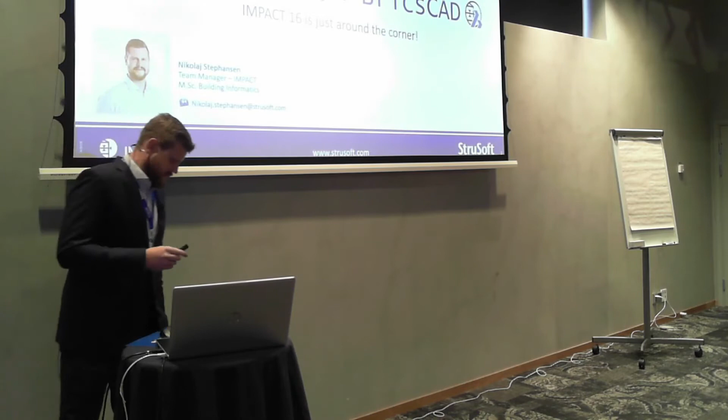I spoke a little bit with Peter about how much time I actually have. Peter said, do not go over five hours, Nikolaj — people will get tired. So let's see if we can keep it to maybe two or three hours, or somewhere around that. But we have a lot of time.

So before we actually start looking at the software, I want to give you guys a little treat. There's something coming out in December other than Impact 16, which is just as big news, if not bigger. Maybe some of you are thinking the same thing I'm thinking, maybe some of you aren't. So just lean back and relax, because we're going to watch the new Star Wars movie now.

And of course not, of course not. I'll jump back into Impact, so we can hopefully do this in roughly 40 minutes instead.

I've listed up a lot of things here, and what I wanted to do in the beginning to set the agenda was list up the features I'm going to talk about roughly. I'm not going to read up everything that's here, because it would just be me reading from a board.

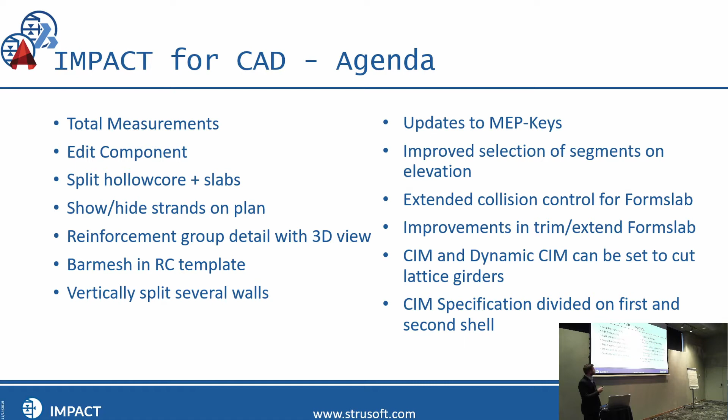So now you're looking here. We've been talking about a lot of different features. There's one thing in particular we've been talking about for Impact 16, especially for BricsCAD and AutoCAD, and that is the slab module. If you have good eyes, you can see this is not here on the agenda. Why not? Because I thought it was too little text to put on there. So we have a big 'Slab 16' text at the bottom. And of course there are more features in Slab 16, but I just couldn't fit it on the screen. So you'll get that as a surprise when we get there.

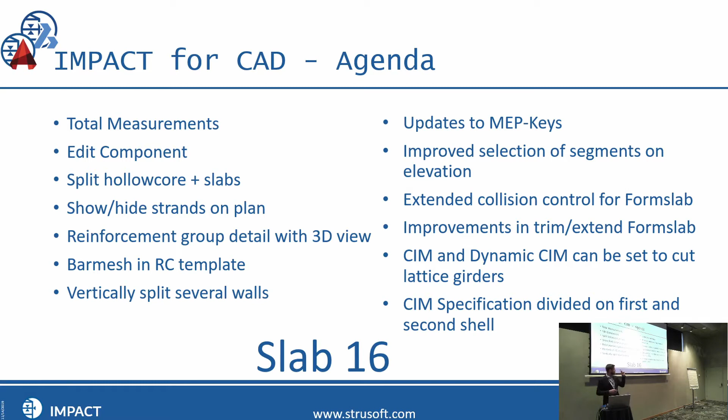The first thing we're starting out with is total measurements. What I did here was take a regular wall drawing, a very simple one, a screenshot that looks like it usually does in the Impact standard.

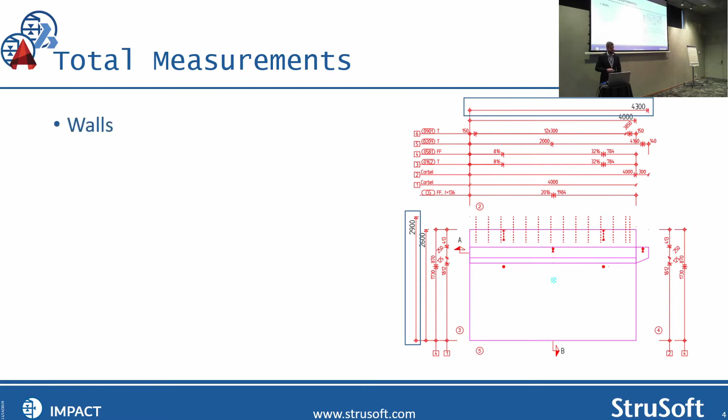What is the new thing here? You might not recognize it at first glance, but if we put a box around it and animate it a little, you can see there are actually two new things — two small dimension lines. But it can make a huge difference for the guys designing, because you need to know the size when you're drawing this element. Here in the example it's a wall, but it doesn't mean this is exclusive to walls — it just means that's the first example I put up.

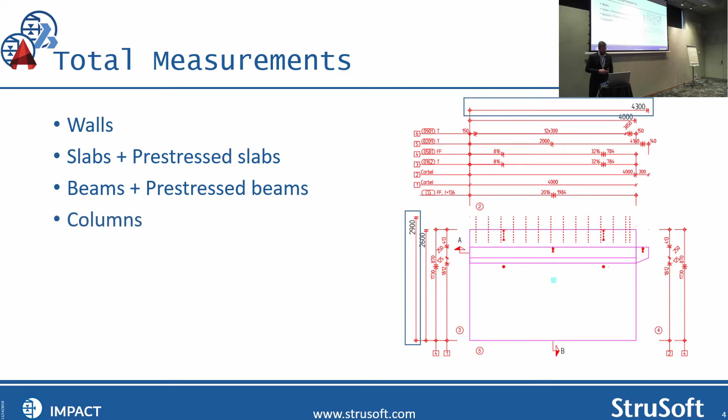So it applies to slabs, pre-stressed slabs as well, beams, pre-stressed beams, and columns too — it is in a lot of the element modules. Other than what you can see here, it includes the geometry from the corbel, and it also includes the geometry from the cast-in materials that we put in at the top.

It can also include reinforcement, where you can add typical tolerances yourself. It's a little bit different how you actually have the reinforcement - is it laying into the element, or is it pointing out always? But here you can set your own tolerances for that as well in the new total measurements.

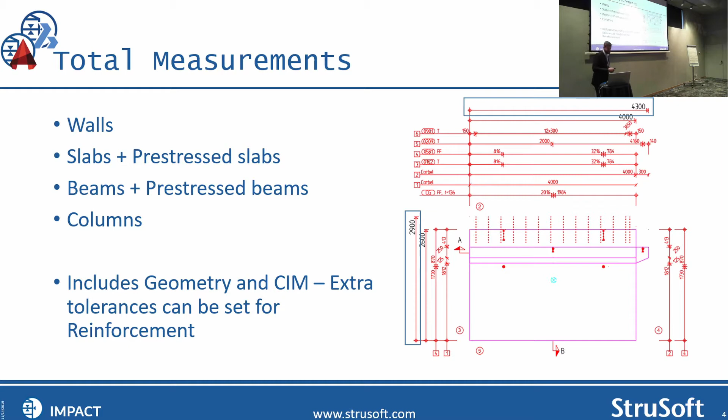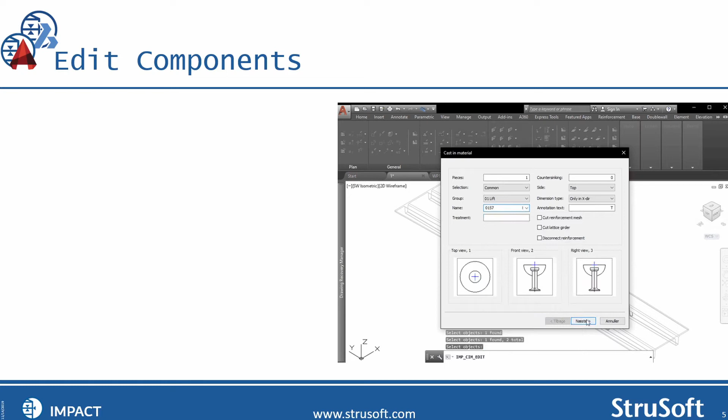So that was the first thing. The next thing, which is on the animation here, seems like a small thing. What we do is press edit cast-in material, or edit window, or edit linear cast-in material. The thing to notice is that I'm just pressing the edit button and clicking directly in the element. You can see this element is unmarked, but it doesn't matter if it's unmarked or not - this means we do not have to ungroup the block, or do anything other than just press edit.

So this edit works on single components in one element, multiple components in one element. It works on all element types, and as I said, you don't even have to ungroup the elements. It also works on the elevation view for walls, and on both unmarked and saved elements.

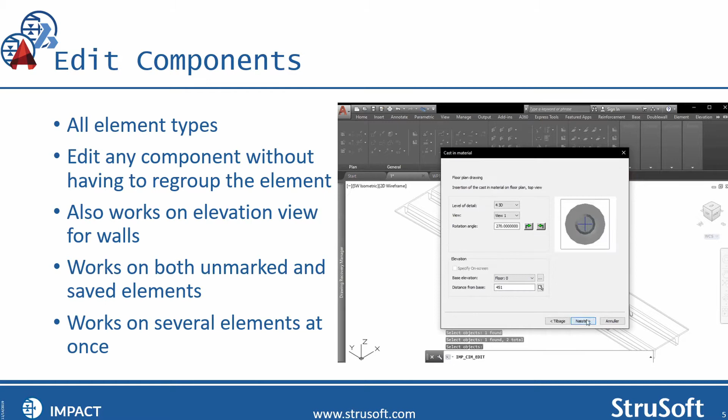And the last thing is that it also works on several elements at once. So this is a tool on top of the find tools and the other edit tools we added during the last couple of years that really can make a difference, especially this one. If you need to make a small change, you want it to be fast. This is also one of the things that Desi pointed out with the shaping of the slabs - when you have to do changes, it just has to be easy, has to work the way that you would think it would work. Do you need to edit a cast-in material? Then you press the edit cast-in material button, of course.

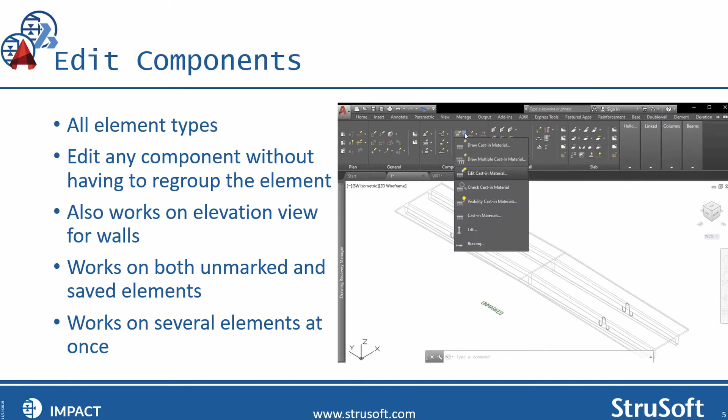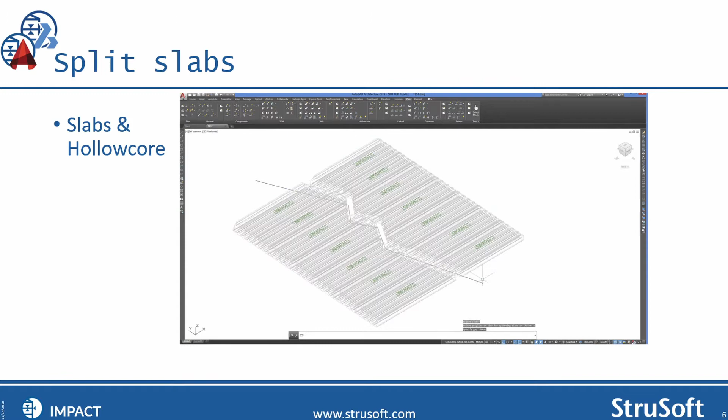So another exciting thing - this is partially part of the Slab 16 module, but I'm bringing it in before I talk about Slab 16, because it also works for hollowcore. I did a couple of animations - it seems pretty easy to see up here. So we have a line, and that line dictates where you want the cut to be. It could be whichever shape you like. The only limitation for the hollowcores is that you do not do curved lines. Personally, I've never seen a curved hollowcore myself, but it might happen.

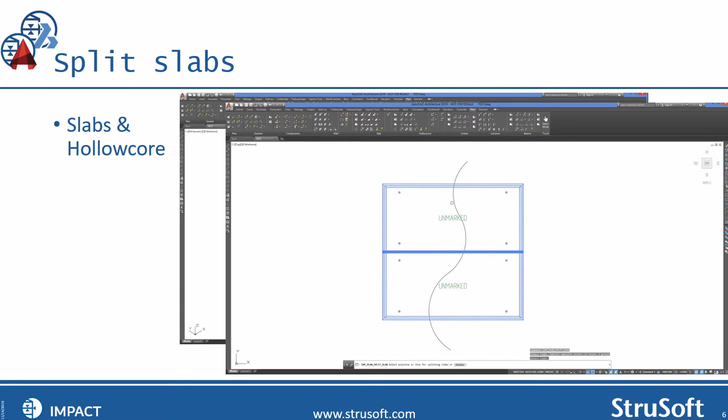For the slabs, it's a different story - here you can have whatever curve you want. So here you have an S-curve going through these two slabs. The difference between the slab and the hollowcore is that when you do it with the slabs, it will immediately ask you what end caps do you want to put on here. In this case, we just pick one of the standard ones in the template, and it will apply it straight away. I'll let it play once or twice because it's fast, and the good thing about showing it like this is that this is literally the time it takes - it doesn't take longer than this. You click a button, click the line, it splits it up. Which end cap do you want? You get the end cap straight away.

So another thing here, also on the plan like the other things we were looking at with splitting, is show and hide strands. So here we have some slabs, some hollowcores, and a double T. This works for all pre-stressed elements - pre-stressed beams, pre-stressed slabs, hollowcores, and form slabs. As you know, you can use the beam module, the hollowcore module, to make almost whichever shape you want, or can imagine even.

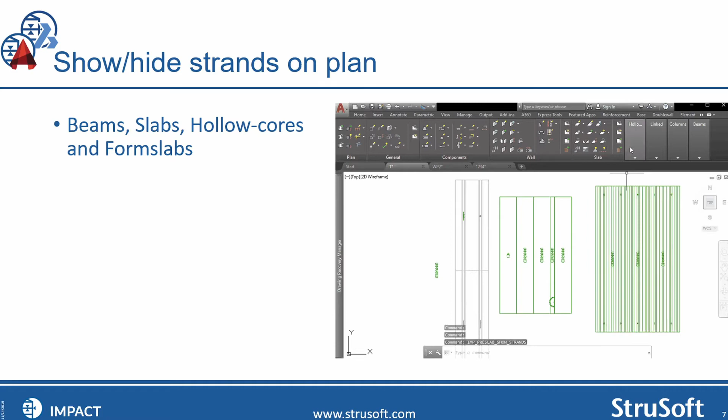So this is a thing that we are very happy to announce as well. Like I spoke with one of you at lunch, what we want to get through here, especially with these tools that we've had for years and years, is that we add a lot of small things, and together those small things become a huge thing that can really save you time in your everyday work. Or in this case, just make it easy to see exactly where the strands are, to coordinate whatever you need, put a hole in, or whatever it is you need to do.

So, reinforcement group is a thing. I'm from Denmark, and it's used very commonly in the Danish factories we have. I know a lot of the Swedish factories do it as well, but I don't know exactly how many of you use it. There is a lot, at least.

This reinforcement group detail is, for those who don't know it, when you draw a reinforcement group, Impact will put in a picture for you showing the details of it: which dimensions do we have, what quality is it, what length is it. You can change the text and everything like that.

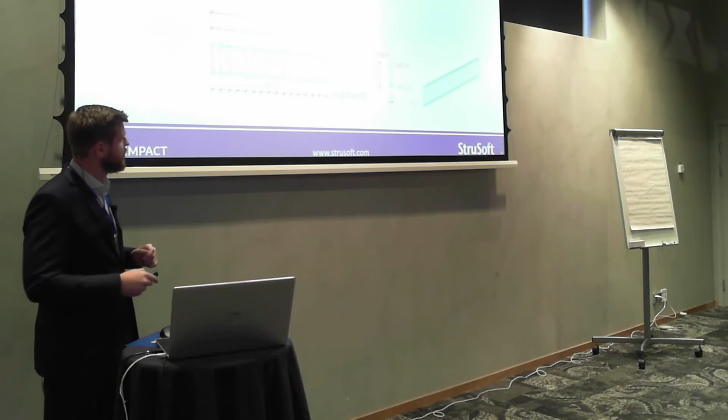The new thing is the 3D view here. For presentation purposes I put up a simple one - it's much easier to see when you're sitting 20 meters away at the back. But where it really starts to help is, of course, the more complicated these shapes are, the easier it will be to see in 3D.

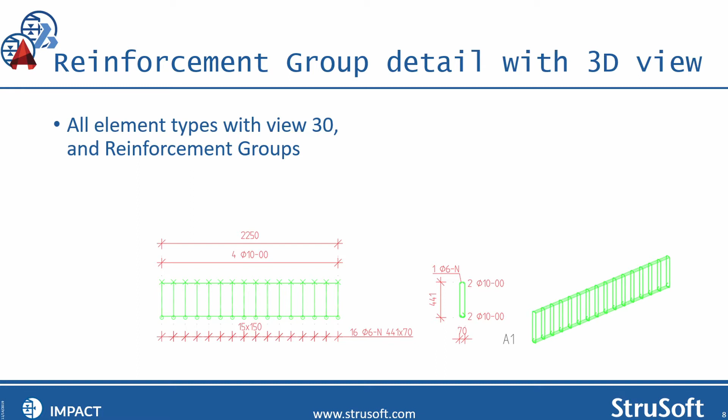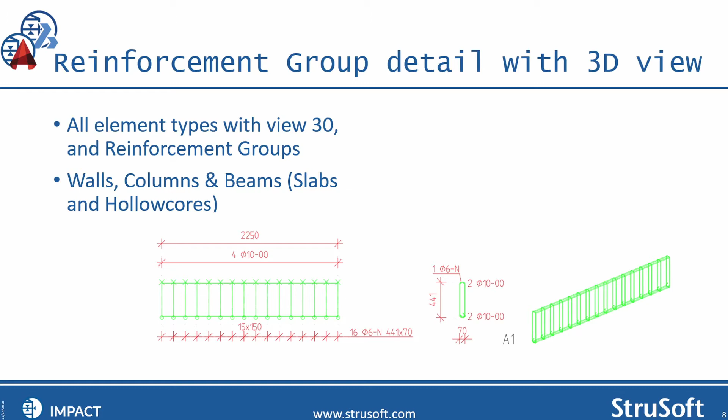Where can we actually use this? Well, the quick answer is all element types with view 30. It gets a little bit technical. What does all element types with view 30 mean? It actually means these element types: walls, columns, and beams, and then in parentheses, slabs and hollow cores. I've never seen a reinforcement like this in a hollow core, and probably never will, but in slabs you might have something in the edges that looks a little bit similar to this. So for a lot of different element types.

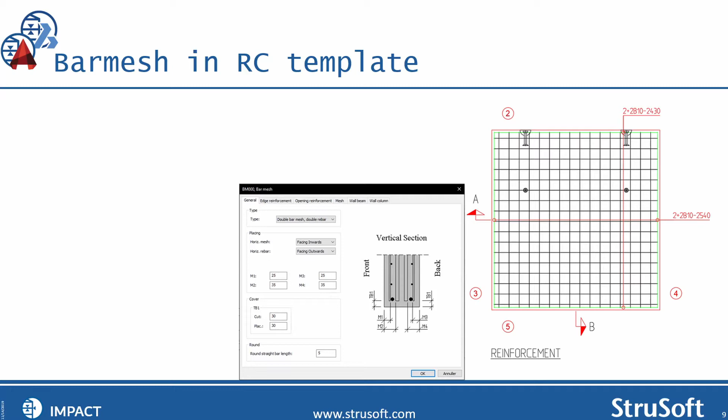So a new thing, Jacob - is he sitting? Oh, he's sitting right there. You had a question before to Desi about mesh and going from directly a machine file to the mesh welding machines. This is not a new feature for the mesh itself, but a new way of adding the mesh to the elements. So the reinforcement template we have - usually we only had the area mesh as we had before.

But now it's possible to select bar mesh as well. This means that when you're doing the bar mesh, you can have it set directly in the reinforcement template. That means you have to do zero clicks to get it in the drawing. So going from one, two, or three clicks of deciding which mesh you want or which element you want it to, you can just put it in the template, and all the elements with that template would have this mesh ready to be sent directly into a machine. So as I wrote up here, now it is even faster to get your reinforcement information to the automatic welding machines. A lot of the features in here are about making it faster, making it easier.

Walls and slabs, actually - so this is also part of the new slab module. It will make more sense for the slabs later.

Other than that, as a little bonus, for very heavily reinforced elements, the drawings - the more you have in the drawing, the slower it tends to get. These have been split up into several categories. So it might be you're adding a new reinforcement to a window in a wall, or a new reinforcement to an end cap - that can be done also in a slab, or in a wall, for example. Or you just want to redraw the mesh, or whatever it is you want to redraw. You don't have to redraw all reinforcement anymore - you just redraw the part that it is you need. So this is again a thing that can make the workflow much more straightforward and faster. You don't have to sit and wait for anything that you don't need to do.

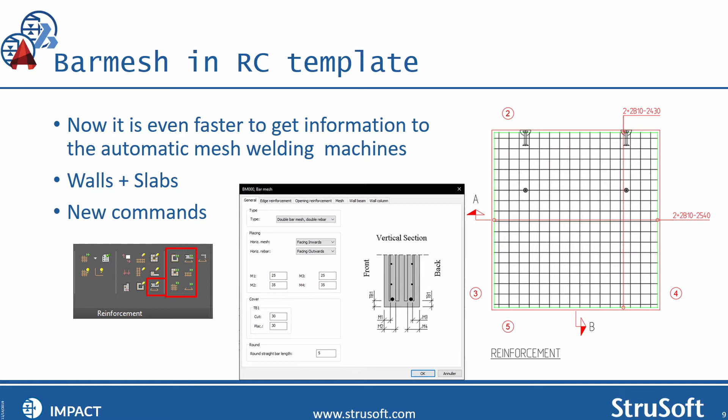So again, the very nice features - I'm saying that every time we get to one, but of course I only brought features we think are very nice.

So, vertically split several walls. I think I'm standing over here - a little bit easier for me to see, actually. I'm right-handed.

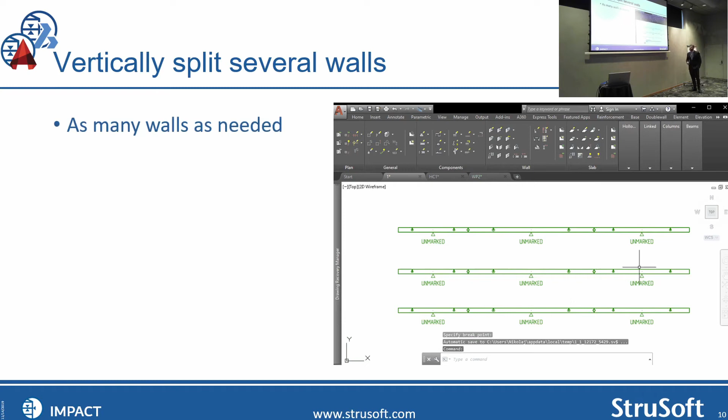The three walls here - for those of you who use Impact Design for AutoCAD and BricsCAD today, know that this is not possible; you split one wall at a time. Here I have three walls. It could be 10 walls, it could be 2 walls - however many you like, and you just select where to split it just as usual. The difference here is just you can select more walls, as many walls as you need. And it also works on elevation drawings as well.

The segments on the elevations then. Now when I mention the elevation drawings, we're jumping to a new feature about elevations. This is actually not only about elevations, and why is it not that? I'll get to that in a second. So this is an elevation drawing.

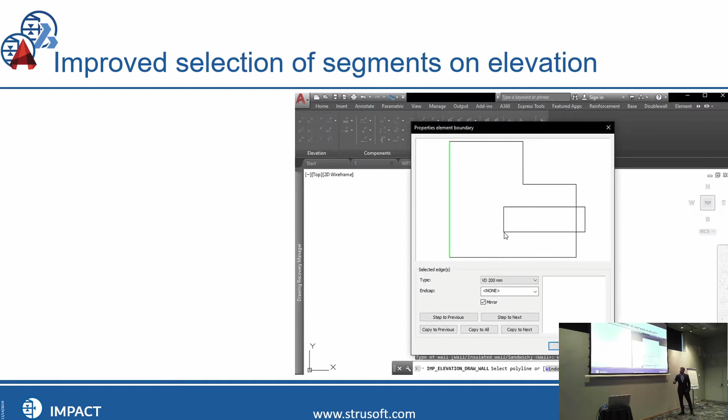We're starting an elevation. We want to draw a wall with a shape. And this video is very fast as well, but again, the same thing is, it literally takes the amount of time that this video shows.

So you have the shape, and you want to put in these - I have no idea what these are called in English, as a leader, or something like that. You need it to be on the left and on the right side. You have full control of however many segments you have. So you can see I just mark it up here in the picture, and you get the end caps on straight away, press OK.

So it's easy to select multiple segments. You don't have to go through the segments as you're used to. And it works on walls and form slabs. And of course, form slabs, that is not on the elevation, you do that on the plan drawing, but it is the same functionality as it is for walls here in this case.

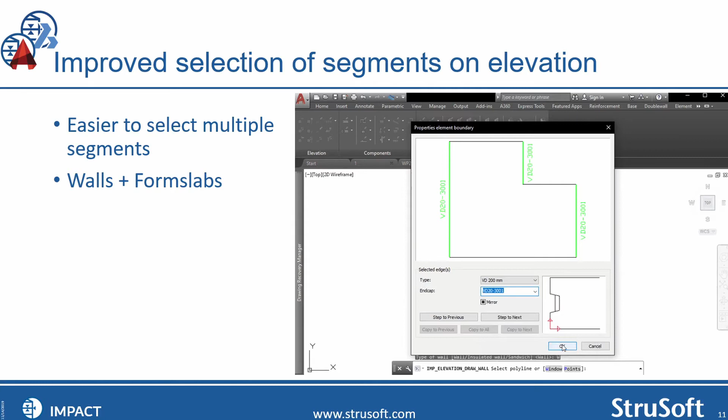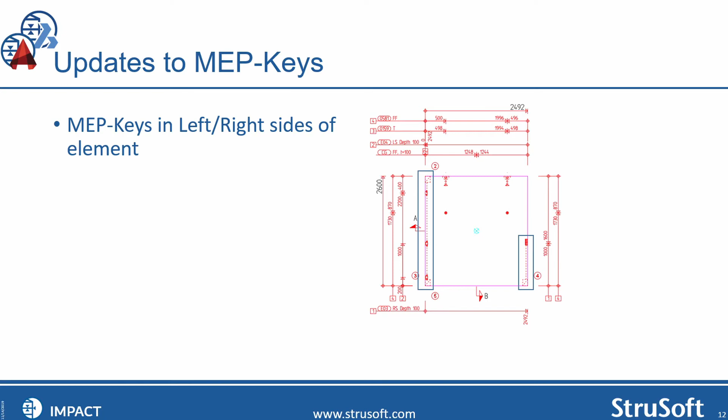So one of the biggest things is, it might seem as a simple thing, but a big thing if you need it, you can put it in the left and right side of the element, or as in Denmark we say, side 3 and side 4. And this is a completely new thing. You've never been able to do this before. And of course, on this drawing you can see here, we have two different MEP keys. One is placed in the left, one is placed in the right side.

When you get to your MEP key, you're setting up your MEP key, and you're getting one that is complicated. Again, this is a very, very simple example, so it's easy to follow what's happening when you're sitting far away. When you select whatever item, duct connection, or recess, it selects it in the grid to the left as well. So you don't have to think about where you are, think about what it is you're adding. You can see what it is you're doing.

Of course, you could always see what it is you're adding, but when you get to a complicated one, and you want to edit a specific duct connection, instead of having to press it in the grid, you just press it in the preview picture instead.

We can create MEP keys. Now I don't have an animation for that, from ducts and items already drawn. It means that when you draw something manually on the drawing, you can mark it up, and you can create a new MEP key from using that. You can also copy on the MEP key lineup. You can also copy MEP keys there and create new MEP keys from that. And that, among others, is what I call 'and more' here on the slide.

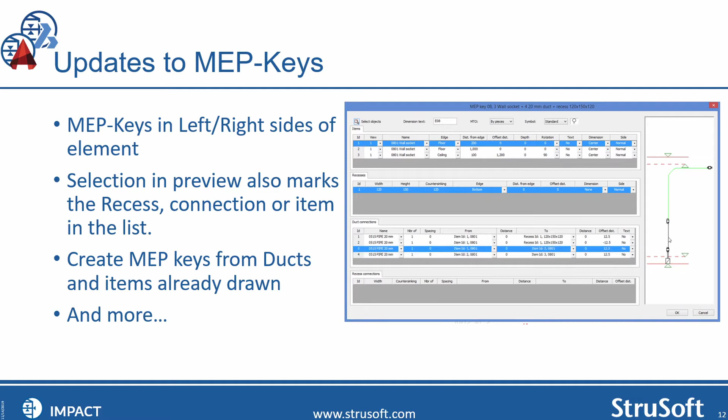So there are actually 2 or 3 or 4 features more here. In general, for all of these features that I'm going through here, I simply don't have time to show everything. And as I said, maybe 15, maybe 20% we actually have time for. So if it's something you think is relevant, write it down, give us a call, write us an email. We'll help you get set up when you get to Impact 16, of course.

Collision control for form slabs. I actually talked about this last year as well. But that does not make a difference in that it is coming out in Impact 16 still. The only difference is that Impact 16 will be released 6th of December. As the theme of the presentation was, Impact 16 is just around the corner.

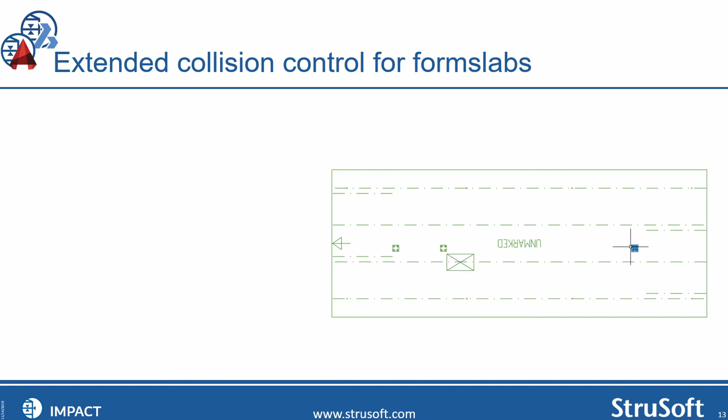So basically what this does is, you have variables you can set. How far distance is it from a cast material to a hole, or a hole to an element outline. And these variables, you can change the tolerances yourself. As a standard, we put 30 millimeters. You could have 50, you could have 100, whatever it is you need.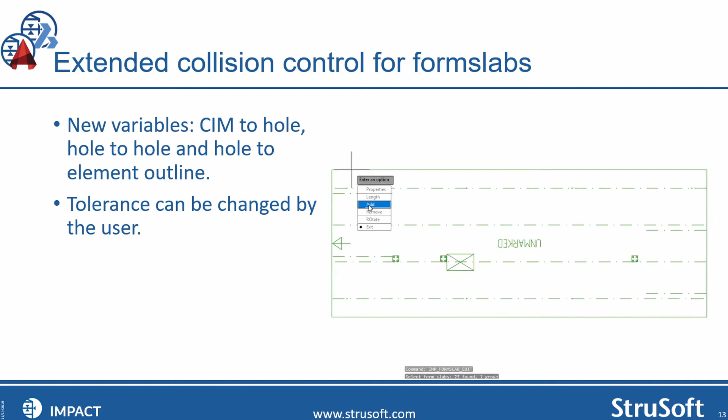And the way that the software shows you is when you move it. So, of course, see this one here. Here, this cast-in material there is too close to this hole, at least according to the tolerances that we set. That is why both the hole and the cast-in material are red. These two, of course, is part of the one we have already, is because it's on the girder.

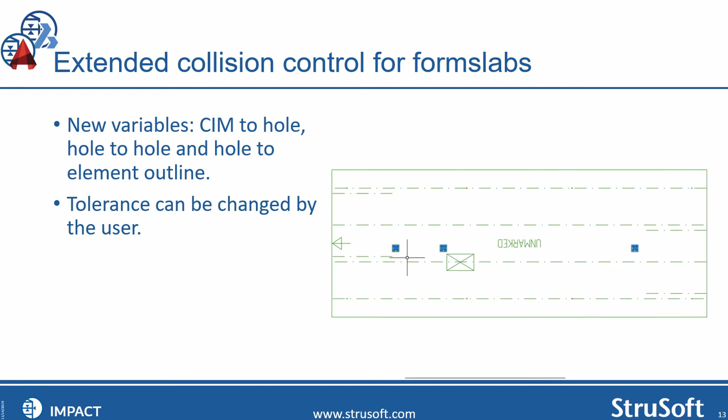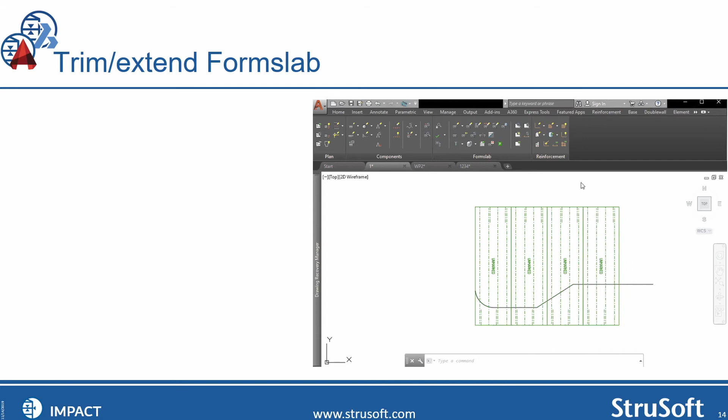So, shapes. Let's just dive straight into the action. Desi threw me a ball earlier today about shapes and editing shapes. She had a great presentation of exactly how you do it, drawing everything up. I cheated a little bit, I drew the line before showing the animation, but I was thinking most of you probably know how to draw a polyline in AutoCAD, so we don't need to show that.

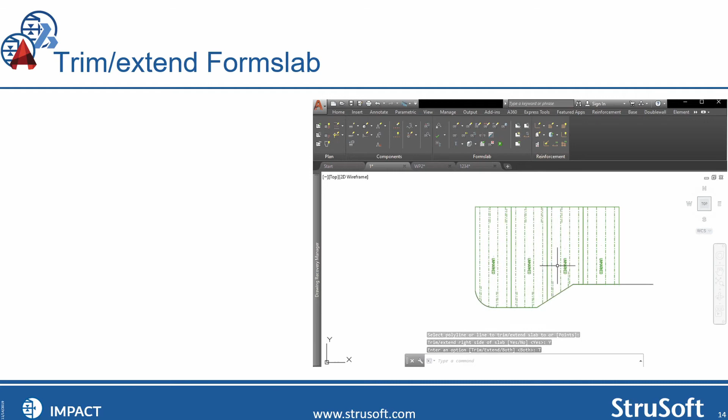Trim and extend. You can trim, you can extend, or you can actually do both. Take a look at the shape here. This is not an unusual shape for form slabs, it's not a new shape. The new thing is that we can actually trim and extend the form slabs. We haven't been able to do that before. Now available for form slabs, as it says.

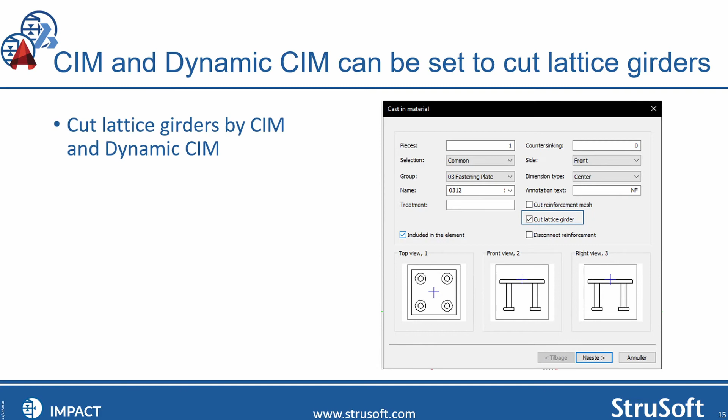So we pointed out for you, this cut lattice girder is the new thing. What does cut lattice girder do? Well, it cuts the lattice girders. You can use this both for cast-in materials or dynamic cast-in materials.

Here is an example, might be a little bit difficult to tell, but these two here in the corner, they would have gone straight through if we haven't had the plates here. So this is what it means, it splits it up into segments, of course automatically. You don't have to think about it, you just put it in.

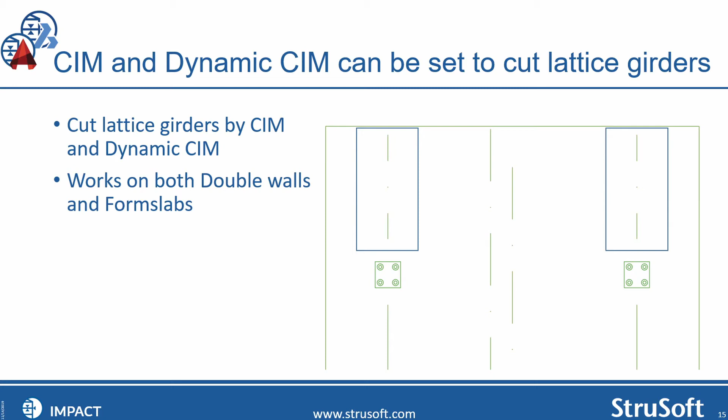And as I mentioned, this works both on double walls and form slabs.

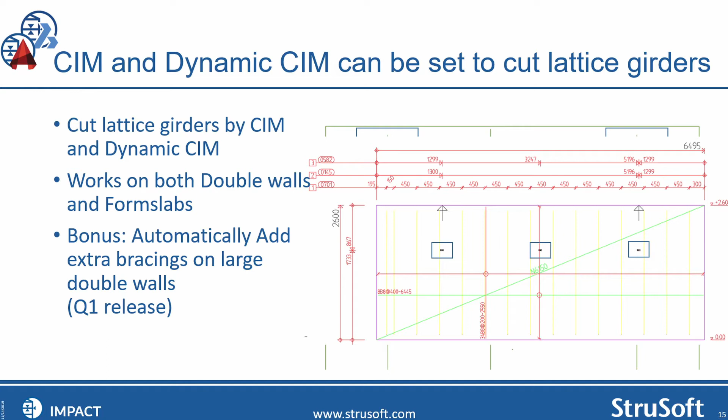And this one is a little bit difficult to show, but one that can also make a huge impact on the way that we actually look at the drawings. And this is for double walls.

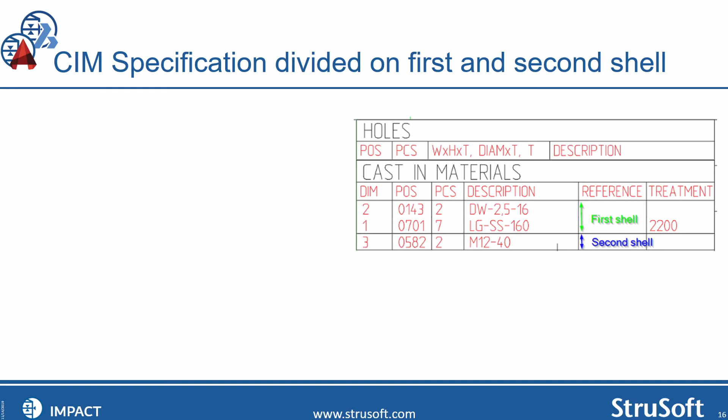This is splitting up cast in materials in the shell that they're put in. So is it in the front shell, or the back shell, or whatever you call them? It might not be front and back, it might be second shell and first shell. So they will be numbered differently depending on which shell they're in. It might be the same casting material, but as before we had maybe dimension 2, now it will be called dimension 3, or 4, or 5, whatever number we get to.

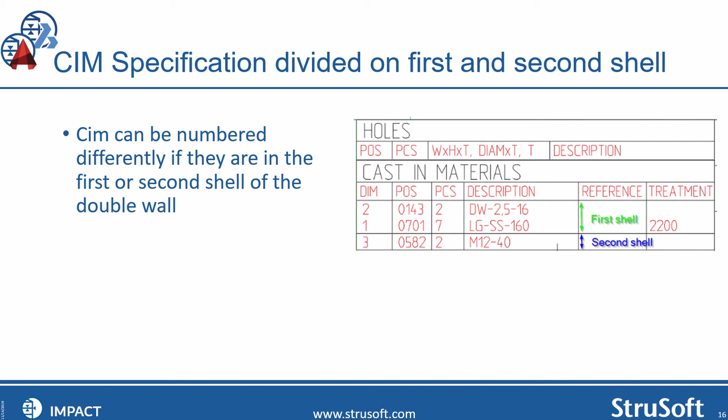This is visible both in the schedules you have on the drawings, but it's also visible directly on the drawing, on the dimension lines. It does not look like much, and this is why I put in a couple of colors here. Just notice the important thing, that none of these two colors are red.

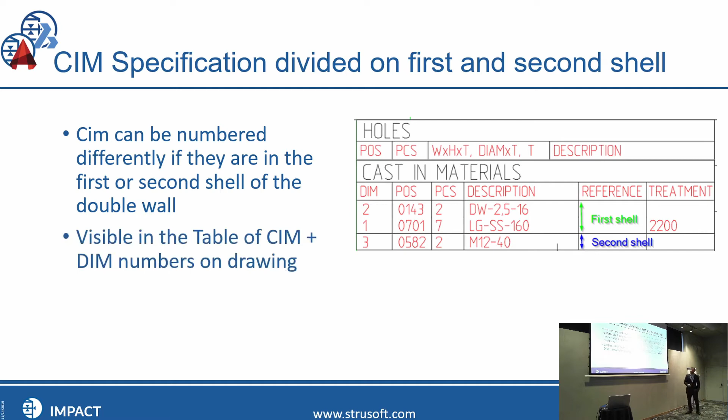Unfortunately, the text is red, which, with Frederick, what he talked about before — red means it can be improved. Red doesn't mean that in this case. Visible in the table cast in materials, of course, and also the dimension numbers on the drawing.

So now we're jumping back to the agenda. Why are we doing that? It's of course because we've come to a point where I want to spend a little bit of time on this — the new Slab 16 module. Peter, how many years have we been talking about this? For a long time, at least 5 years. I promise you, at least 5 years. Now it is less than a month away.

Finally, the new slab module in Impact 16. And there will be a little bit afterwards — what does it mean exactly? But you would know that yourself anyway after we've gone through these things, especially for you guys using the slab module. You can see a huge difference in what you're able to do today, just from the small mock-up I've done here.

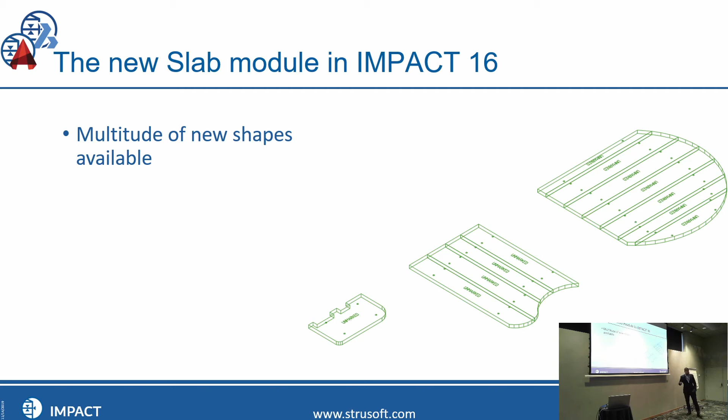And of course this goes through the whole thing, so for the drawings you get the radius, you get the measurements that you need for the rounding. So the drawings are just as ready to go as they were before, even better actually, but we'll get to the drawings in a few minutes.

The next thing we jump into is end caps, and I'm using the same slab or balcony here as before. This window for slabs is brand new. You can see that for each segment of the polyline you use to draw, or for each segment that changes the geometry of the slab, you can add an end cap.

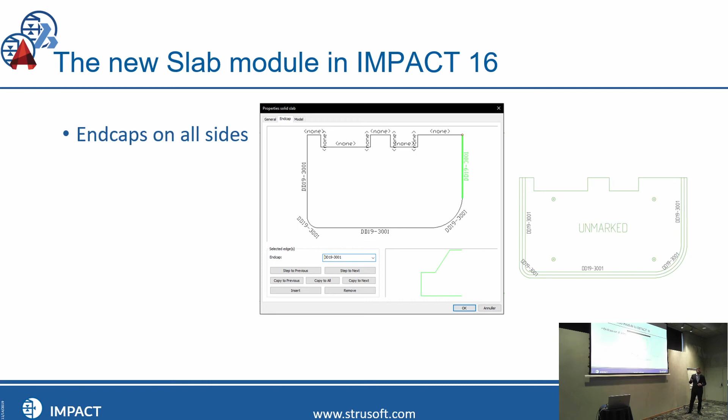Before, we had a maximum of one per side. Now we have no maximum anymore. You can have as many as you want, or as many as you need, which is the important thing. In this case, this is just a test end cap. You can see how it looks in the plan. This one I'll be moving forward with on the drawing as well, so you can see how it looks there too.

But before we get to the drawing, there are some things you do beforehand, before you even start making the drawings, that you didn't do before. You can do them now, which is the same as what you do when you draw walls: you use reinforcement templates. This is a slab reinforcement template.

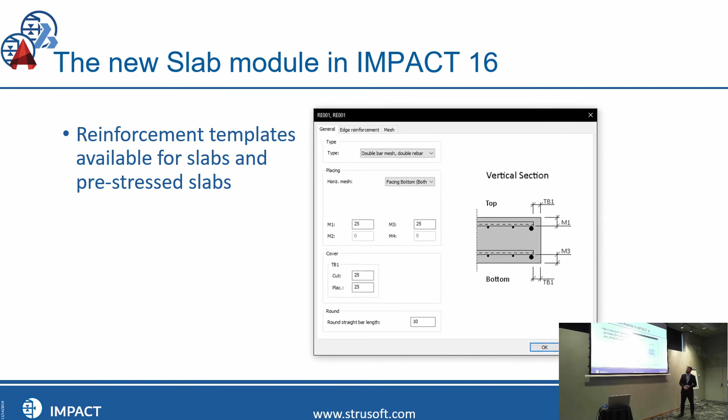It looks a lot like the wall reinforcement template, but that's the whole point. You want to be able to have multiple meshes, control which direction the meshes go in, have bar mesh for machine files, or area meshes for mesh you order from outside so you know how many kilos or tons you're using. All of that is possible now in the slab module automatically, meaning no more drawing meshes manually on your slabs.

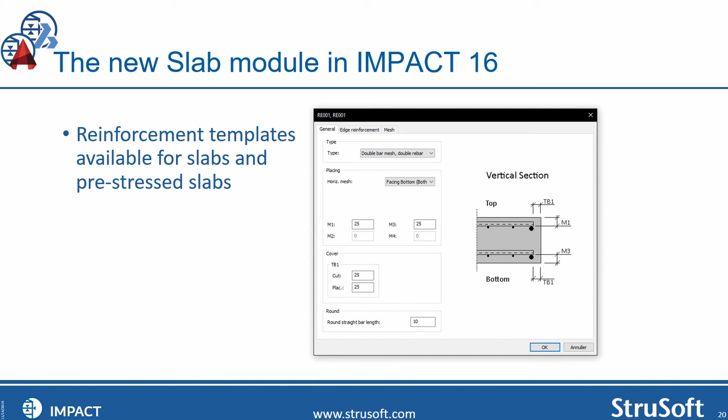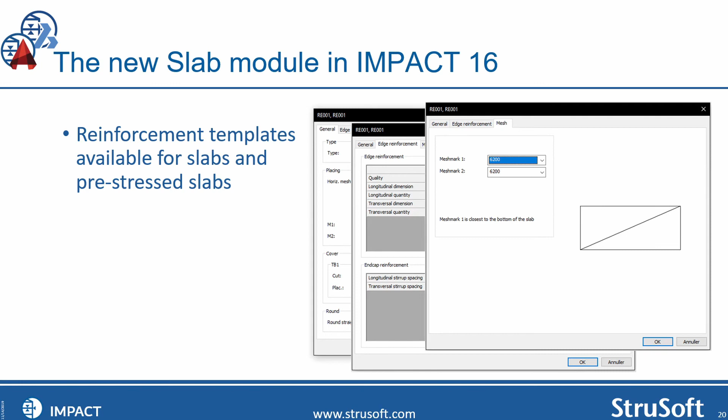Jumping to the second tab, we've also included the edge reinforcement from the walls, and of course the end cap reinforcement here too. I have a picture about the end cap reinforcement later as well. Lastly, we want to select what mesh to use, and these are the same mesh definitions used on walls. So everything you already have about the meshes used in your factories is already in your database, making it really easy to get started.

So, as I mentioned, reinforcement in end caps. Now the end caps for the slab are also a little changed, looking more like what those of you drawing walls are used to seeing, with the specific addition that you can actually add end cap reinforcement. For those who don't know, end cap reinforcement means that from the beginning to the end of the end cap, you get automatic reinforcement with stirrups and straight bars. What we had in the template before was the automatic distancing of the stirrups to each other.

What you can also use to reinforce the slabs is the reinforcement groups I showed you before. You can take the automatic reinforcement, save it as a reinforcement group, and get a 3D view on your drawing. There are so many opportunities and different ways you can play around with this, use it, and get it tailored exactly how you want to work, like you're used to in Impact with all the tools.

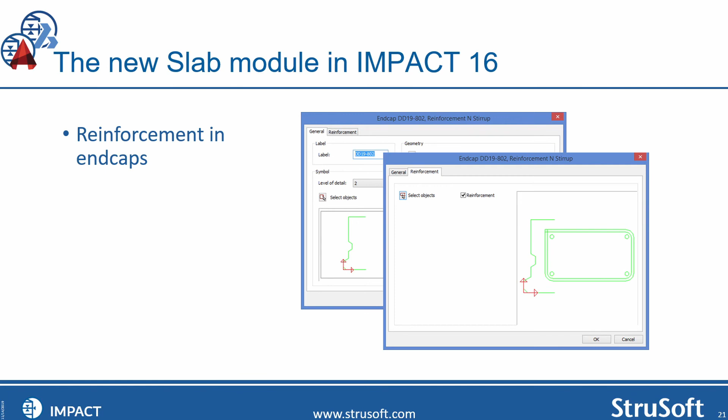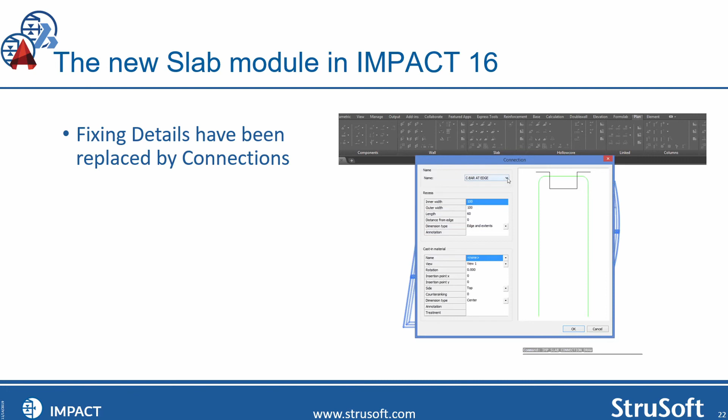Fixing details. For those of you who used fixing details today, they're gone in Impact 16. They've been replaced by what we call connections instead. This video shows how to use the connections, not how to set them up. It's a process that takes 2 minutes to set up a connection. A connection is a piece of reinforcement, or pieces of reinforcement, a cast-in material, or cast-in materials, maybe even both, and then a recess.

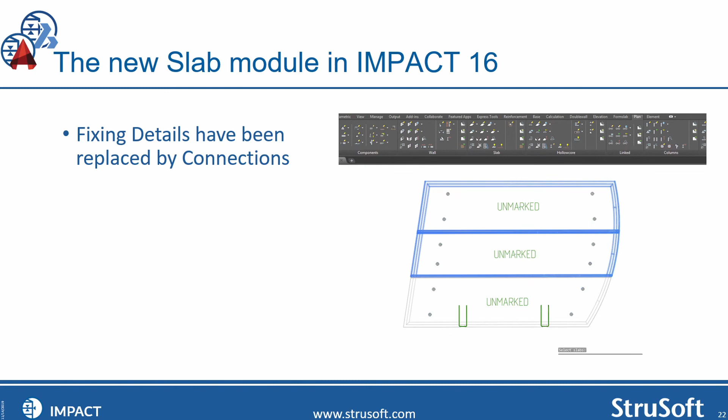So in principle, the same as you had in fixing details, but now the difference is you select the whole floor, for example, because that's usually where you need this, at the edges of your elements, where you need to do that fixing with other things. This small animation shows that you can just go through, and it's what we call face-based. It selects the side face of the element, so it can automatically control how it needs to rotate. You don't need to think about that anymore.

Jumping to the shop drawings. The same slab as before. Now we have dimension lines. All of that is very, very similar. For the bent piece here, you have a radius, and you also have the dimensions. For the other one, you have another radius. You have your end caps. And in this case, again simplifying the view a little bit, we have one end cap for it.

Another big difference is, of course, for the ones of you who use slab, I don't have to tell you about that difference. But for the ones of you who don't, I can tell you these two views are new as well. These are sections. Before we had a profile that we showed, with one section you could not control the section. You just had it, just like you have with a hollow core.

But for a slab or a balcony specifically, or something with a little bit more advanced geometry, you need to be able, and you want to be able, to have more sections. In this case, I have two sections, one horizontal, one longitudinal, and you can actually have as many as you want and have them wherever you want.

The mesh, in this case, I used the regular area mesh, and you can see it puts it in both of these sections as well, and you have the same symbol that you would be used to seeing from some of our other modules also.

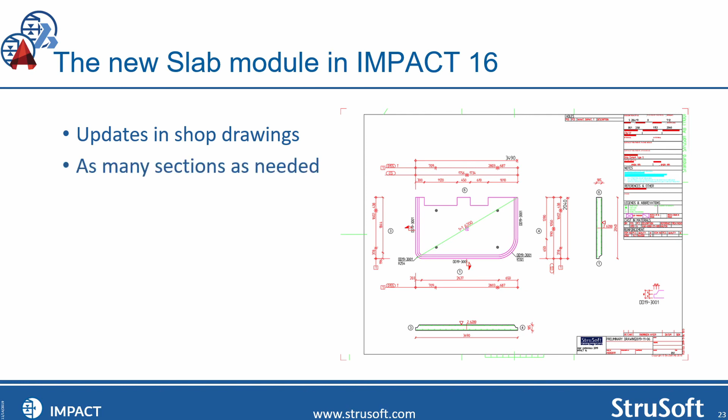So all in all, this drawing compared to an old Impact slab drawing is extremely different. Fundamentally, it gives you a lot of new possibilities for the shapes that you need. You don't need to put in manual work. Everything is set up, you have features for everything, or almost everything - everything is a dangerous word. As many sections as you need, of course.

So there are more features, but I can't spend 5 minutes on each feature, then we'll be here the whole day. As I said, Peter forbade me to take up 4 hours of your time, so we have to keep to the time.

We can convert the slabs to pre-stressed slabs. This is also a new thing, and vice versa, back and forth. Are you finding out that this project has changed? You don't need to redraw anything, just convert it.

Split the slabs, we already looked at this earlier. You can invert your casting of your slabs. Again, if you're doing something like a balcony, or something with lifters, you need a surface that is better, so of course you want to have the surface of the slab down in the mold. That is exactly what invert casting of slabs means - it's inverted compared to the way it's put up on site.

You can even override strand patterns for pre-stressed slabs. It might be you have an engineer who's a very good FEM-Design user, so he found out you don't need this many slabs. It might also be a good pre-stress user, and he says you don't need this many strands. But in your database, you have a strand pattern called 16, and you have a strand pattern called 8.

You put 16 strands in this slab. The engineer says this is way too much, you only need 12. Then you can go directly in, and you can just pick the strands that you want without even having to make a new definition. And it will save on that slab, or those slabs if you mark more.

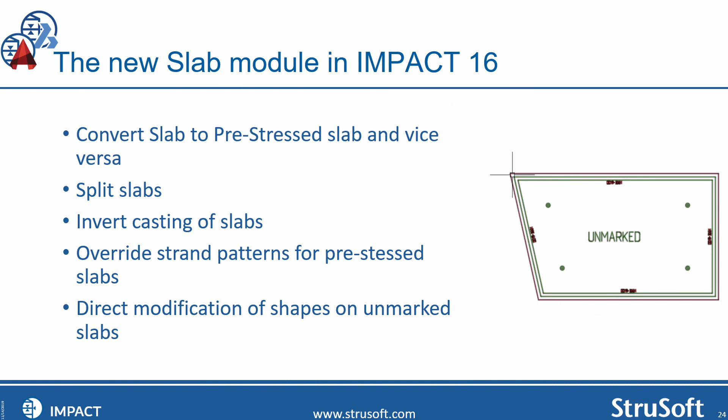So another thing I had to show with an animation is we can directly modify the shapes of single unmarked elements just by dragging the ends. And now I'm saying just by dragging the ends, you can actually do more - we have to have the video start over again because it's the first thing you actually do. Here we change the shape. If we click on this first, you can see there is one segment at the top. We add another segment.

We can add 10 more segments to get the shape that we want, and then just drag it.

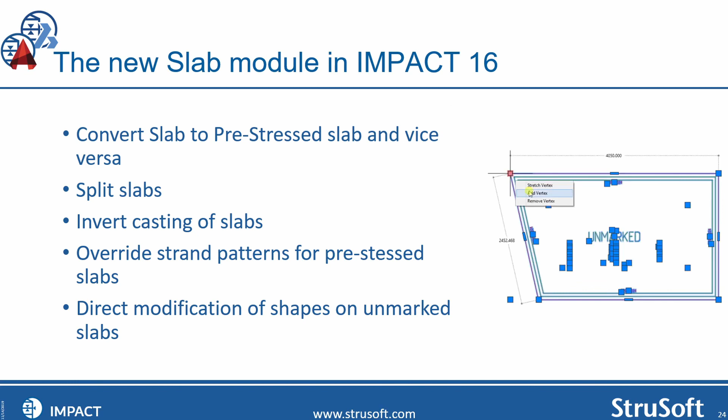There's one thing to remember here: there's actually a reason why the element is unmarked. This has to be done when the element is unmarked. If the element is marked, you'd have to use another tool for that. I like the trim tool.

Another new cool thing to show is that here is a square, but we have a rectangle up here, a piece of circle up here, a couple of holes here, and a welding plate also in this same area.

That means all the items, shapes, and things we want were drawn in this area beforehand. So the way we accommodate this is we ask you to select an internal point, and then it will analyze everything inside the element and also the borders. What it does is it makes the recesses.

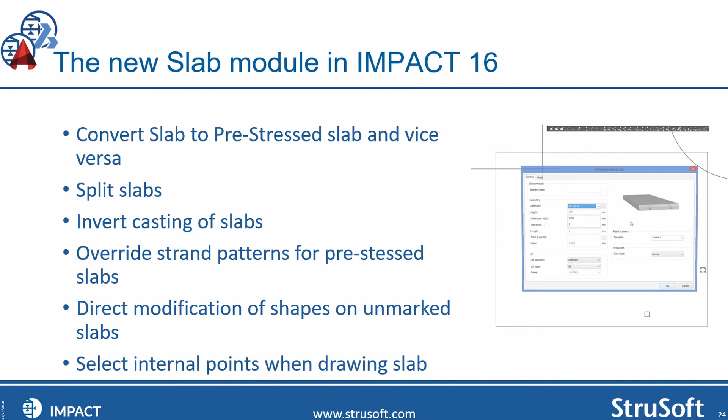If you're paying really close attention when we're doing this, you can see it'll select all items, because of course it's a computer—it doesn't know exactly what it is you want. So you also get the option of adding more things or removing things.

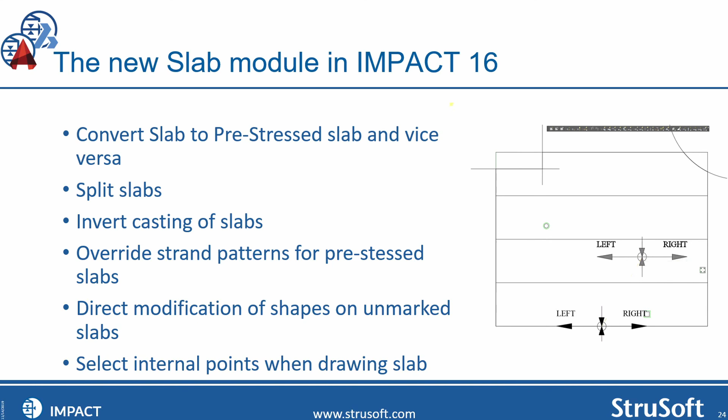So exactly what do all these small changes mean? Well, more flexibility when you're drawing your slabs. You have better features for drawing balconies. You can draw these complicated slabs faster, because you have better features and more flexibility.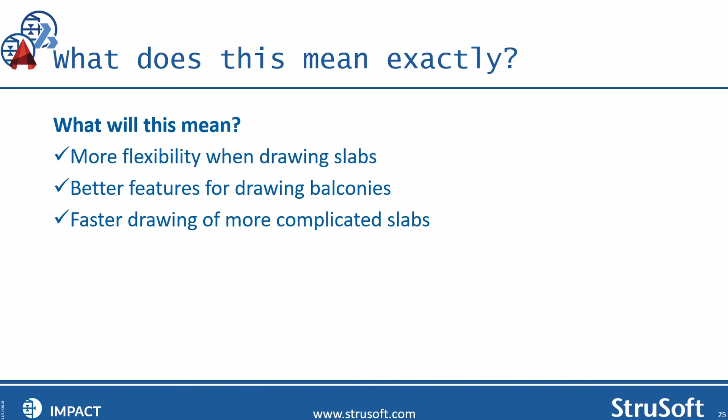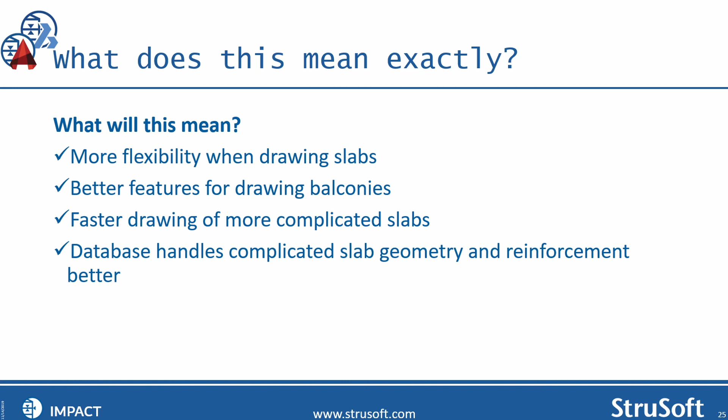And of course, the database handles all this geometry, so everything is saved in the regular Impact database. When you go to production and need to plan these things, it will look like it does here also. So, coming back to what I started with, the theme of this is Impact 16 is just around the corner.

I think I should say there are—but I'll forgive myself for that—100 new features. This is literally 100 new features, not just a number I put up. I don't remember if it's 99 or 101, but we are there. 100 new features. This is not for Impact 16.

This is for AutoCAD and BricsCAD. So only for AutoCAD BricsCAD, there are 100 new features for all of you users using it today, set to release later this year.

How do you want to get started? Well, migrate to Impact 16 and coordinate with us. Some things are automatically there, some things you can add new settings to get using, and of course we're here to help you as always in getting the most out of your software.

Impact 15—I didn't mention any features from Impact 15. There are actually a few features there. If we go back to the last user conference, there have been more things added for Impact 16 as well, for example linear casted materials, columns and beams, and things like that.

As I mentioned, we unfortunately don't really have time for that. You can read up on some of them on our wiki, or coordinate with us if there's anything you think might be of relevance, or if you even want to know if there's something of relevance to you. One thing to remember is that everything released in Impact 15 is also available in Impact 16.

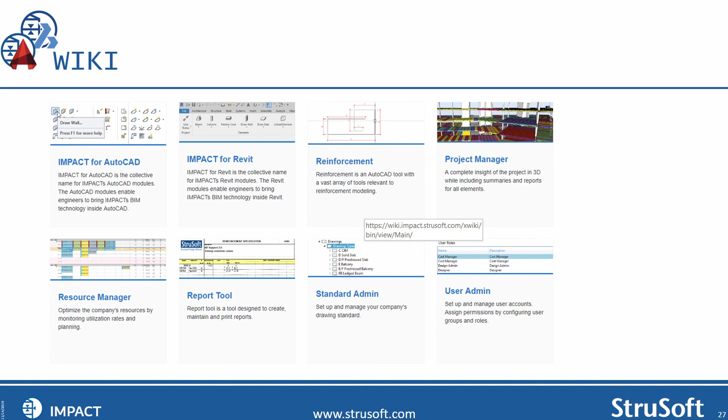So if you want to find something from Desi's team, Frederick's team, the AutoCAD team, whatever, you can go in and find it here. Of course, if something is not in here, that does not mean it does not exist—we are still always here to welcome you and help you. So I think that was it.